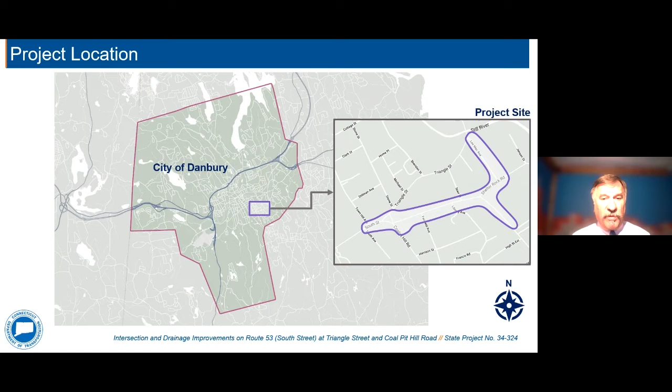The project starts on South Street, or Route 53, at the intersection of Town Hill Road. Moving east, it includes the intersection at Triangle Street and Coal Pit Hill Road. Then drainage work only continues down South Street to the intersection of Shelter Rock Road. There's additional drainage being done south of Shelter Rock Road. And then a major drainage outlet trunk line runs down Shelter Rock Road, down Lee Mac Avenue, and discharges at the Still River.

Originally, this project was initiated as a safety improvement project. The city of Danbury, working with the Housatonic Valley Council of Elected Officials, or HVCEO, now termed the Western Connecticut Council of Governments, submitted a proposal for the project to be developed. DOT, in coordination with the city, developed conceptual plans which received the endorsement of the city and HVCEO.

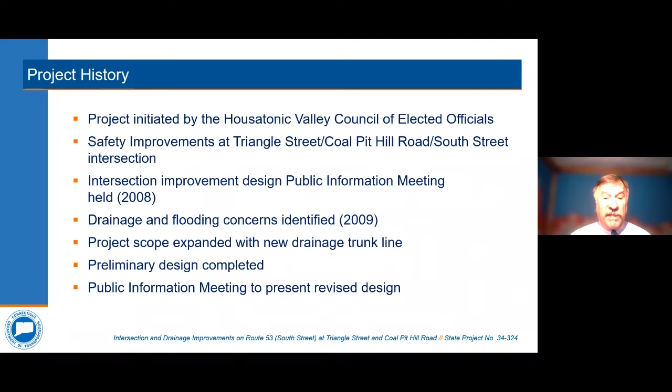In 2014, the scope for the project was expanded to include drainage along the entire route of the project, beginning at the intersection of Triangle Street and South Street, and a large diameter trunk line extending all the way to the Still River. In 2017, the preliminary design was updated to include that drainage work. At that time, the project was suspended for several years, and recently minor changes were made to the intersection lane arrangements at the Triangle Street Coal Pit Hill Road intersection. That brings us to today, where we're presenting the revised design in this public information meeting.

So there are several purpose and need statements that drive our goals for this project. The first revolves around traffic operations and pedestrian safety. There is congestion at the intersections and poor traffic flow, primarily because the lanes are offset and there's a lack of turning lanes, and the intersections are offset from each other.

There are inadequate sight lines at Triangle Street to South Street. There's a high rate of traffic accidents, many of which are rear-end collisions, and some of these accidents have resulted in personal injury. There are no crosswalks at South Street near Coal Pit Hill Road, and what crosswalks do exist within the project area are not ADA compliant.

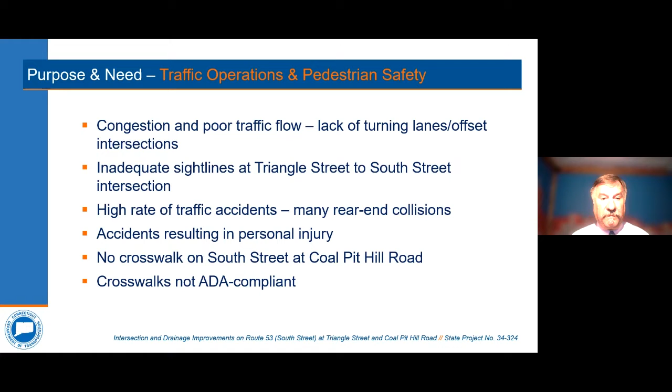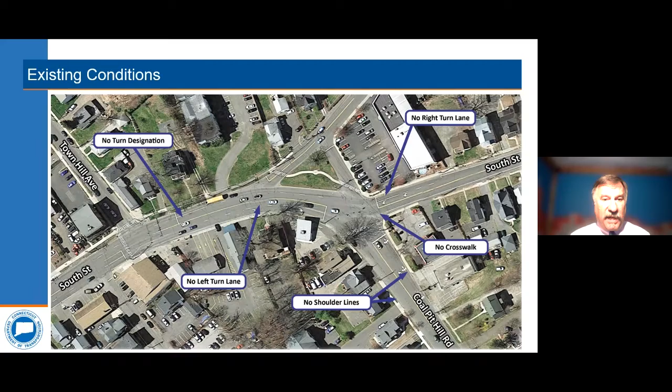So here's a map that shows what I just described. There's a lack of turning lanes at the intersections. The intersection of Coal Pit Hill Road, Coal Pit Hill Road Extension, and Triangle Street are offset from each other. There are no crosswalks across South Street, or Route 53, and the crosswalks that do exist are not ADA compliant.

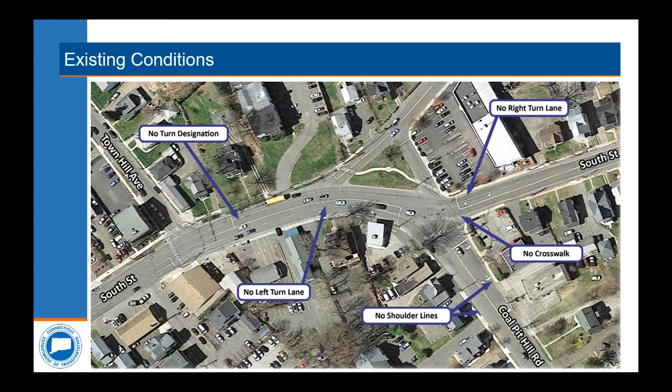This graphic shows vehicle crash information from the years 2019 to 2021. Overall, at the three intersections—Town Hill Road, Triangle Street, and Coal Pit Hill Road—there have been a total of 27 crashes in the last 3 years. 2 of these crashes have resulted in personal injuries. The types of crashes include rear-end collisions and sideswipe collisions, and the split between those two types is about 50-50.

Additionally, the distribution of where the crashes occur is about equal between the three intersections of Town Hill Road, Triangle Street, and Coal Pit Hill Road.

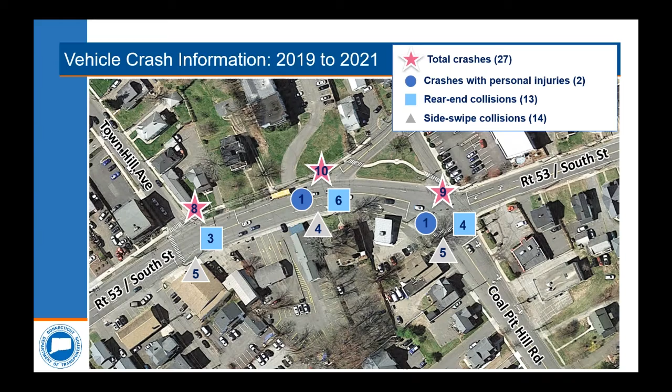The proposed intersection improvements include an upgraded traffic signal at Town Hill Road, an additional left lane approaching Coal Pit Hill Road so that traffic can turn safely onto Triangle Street, a replaced traffic signal at Coal Pit Hill Road, a realignment of Coal Pit Hill Road Extension with Route 53 to take advantage of the installation of the new traffic signal and improve safety, and upgrading pedestrian crossings and sidewalks throughout the project area in the vicinity of this intersection from Town Hill Road to Coal Pit Hill Road.

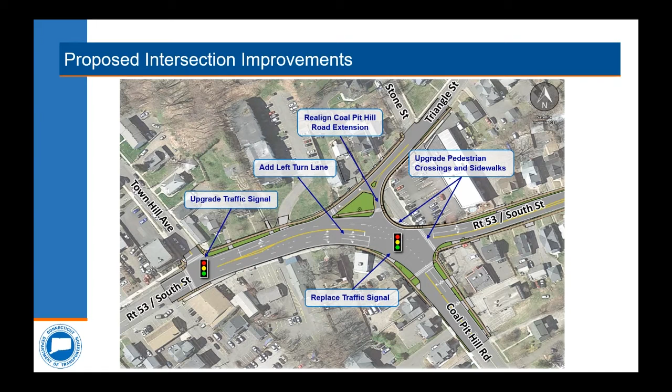With regard to the new traffic signals, the project goal is to make safety improvements without degrading or reducing what's called the level of service at the intersections. Very briefly, level of service is a measure of the delay experienced at an intersection, with A being good and F being poor.

By way of reference, level A is when the delay to start moving once the light turns green is less than 10 seconds. Level C is a delay of between 20 and 35 seconds. Level F is when there's over 80 seconds of delay after the light turns green.

So looking at the two traffic signals, when the project is complete, the level of service at Town Hill Road is expected to be level of service B. In the year 2040, that will reduce slightly to level of service C.

At the Coal Pit Hill Road intersection, when complete, level of service in the morning is expected to be C, and that remains level C in the year 2040.

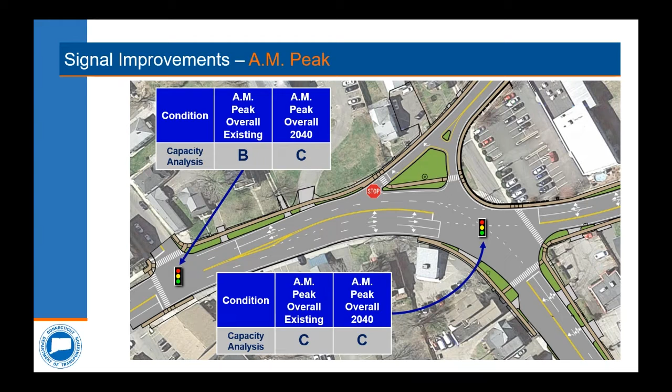I would like to say that without traffic signal installations and without these improvements being done, we would expect the level of service to degrade further than level C and D at the intersections in the year 2040. The goal of this project, after all, is to improve safety without significantly impacting traffic operations, and this design will meet that goal.

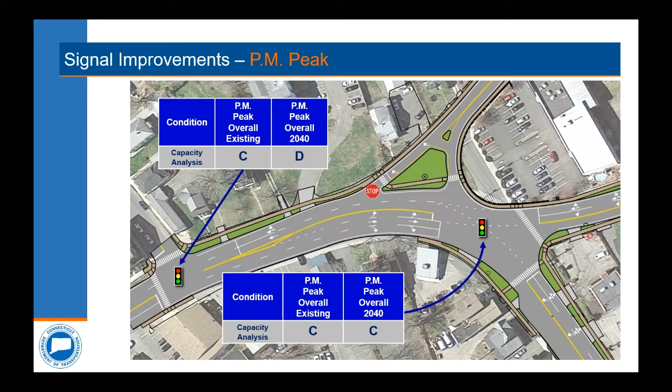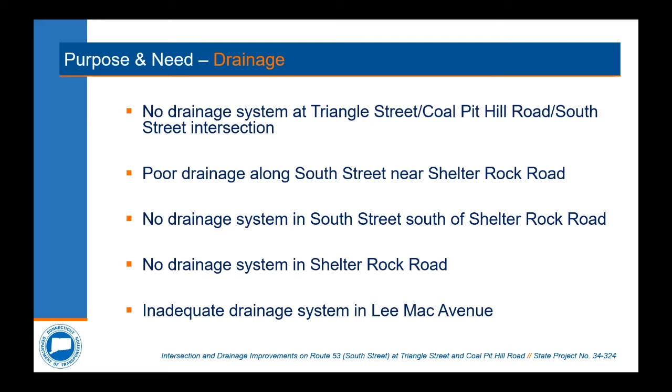The second purpose and need for the project, added on after the original public information meeting, is to improve drainage. There's no drainage system at all at the intersection of Triangle Street, Coal Pit Hill Road, and South Street. There's poor drainage along South Street near Shelter Rock Road. There's no drainage system in Shelter Rock Road, and there's no drainage system, or an inadequate one, in Lee Mac Avenue.

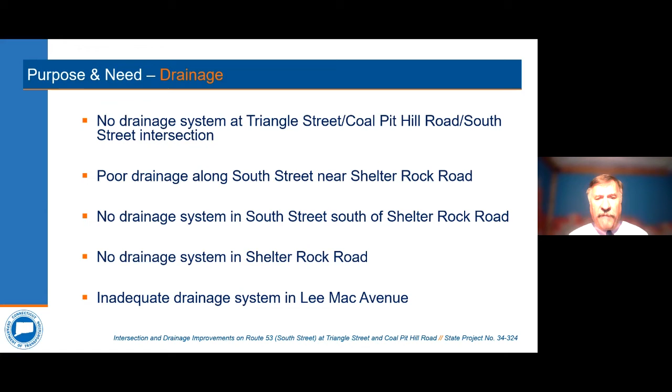And I've got some photos that were taken during one or more storm events, primarily in the area of Lee Mac Avenue. You can see 4 different locations with similar flooding. So the flooding in Lee Mac Avenue is widespread during large storm events.

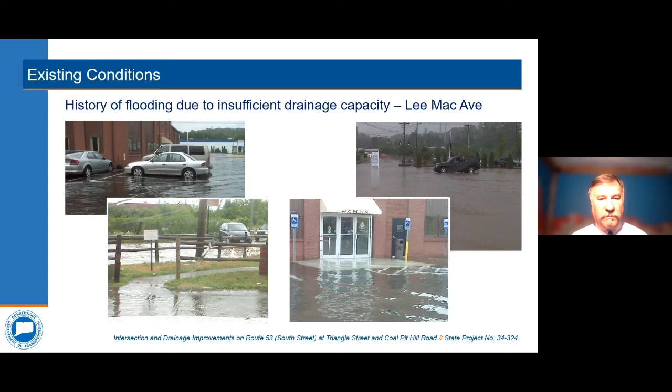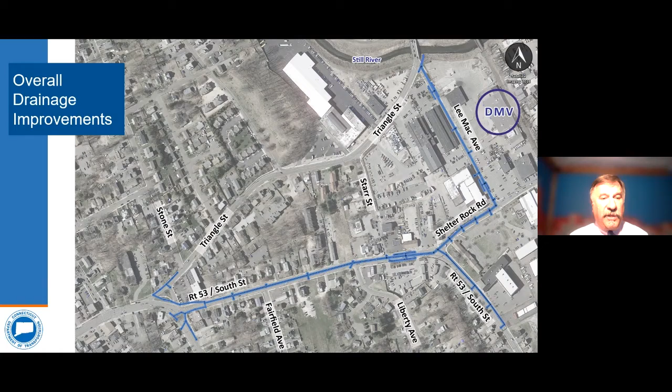This slide shows the overall drainage improvements throughout the entire project, with proposed drainage shown in the dark blue line. Beginning at Triangle Street, we are planning catch basins at the intersections, and I'll show that in more detail on the next slide.

A trunk line will run down South Street with catch basins on both sides of the road. At an existing cross culvert at a low point, there'll be additional catch basins. The trunk line will continue down Shelter Rock Road, then down Lee Mac Avenue, and will discharge at the Still River.

Additionally, south of Shelter Rock Road on South Street, we'll install catch basins as far as is practical to improve drainage along that road.

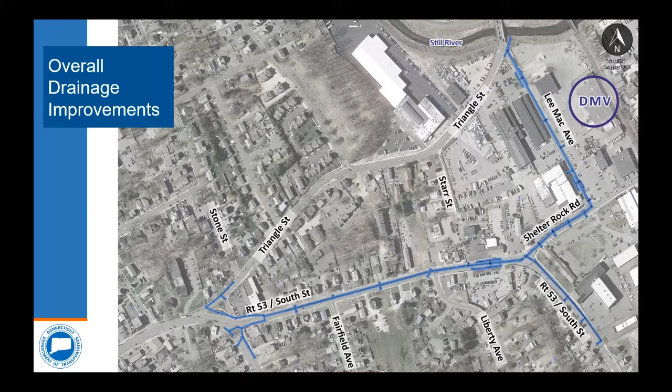At the Triangle Street, Coal Pit Hill Road intersection, there are a number of new catch basins, extending past the intersections down Coal Pit Hill Road as far as we could practically go, and up Triangle Street again as far as we could practically go. The purpose of these catch basins is to reduce flooding and to increase safety for vehicles and pedestrians alike.

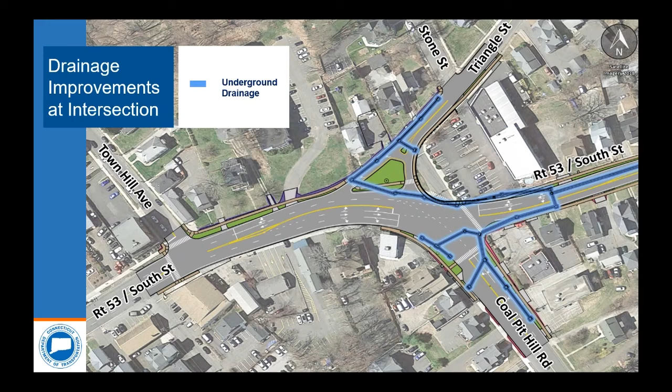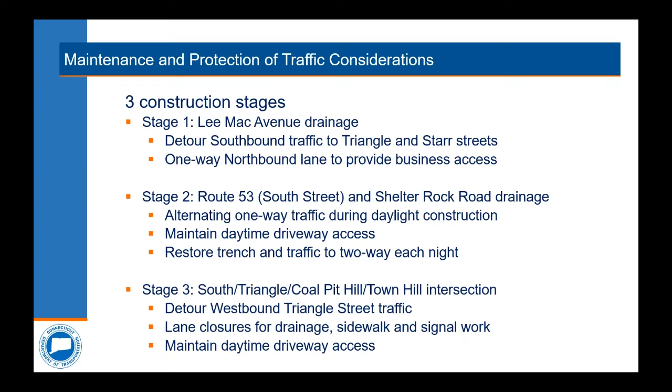Construction of all this work is expected to occur in 3 distinct stages. The first stage begins at the outlet of the Still River. The second stage continues along South Street, and the third stage is at the intersection of Coal Pit Hill Road and Triangle Street. I'll describe that in a little bit more detail for each of the stages.

Under the first stage, when the main trunk line is constructed from the Still River upstream in Lee Mac Avenue, because of the size of the pipe that needs to be installed and the amount of existing utilities in the roadway, we expect that we'll need one-way traffic on Lee Mac Avenue in the north direction, and traffic in the southerly direction will be detoured onto Triangle Street, then to Starr Street, then back onto Route 53.

We will provide access to all businesses and properties along Lee Mac Avenue and for all of the roads at the intersection at all times. Again, the reason for the restriction of one-way traffic on Lee Mac Avenue is because of the size of the pipe that's needed. We do recognize that the Department of Motor Vehicles is on Lee Mac Avenue, and access to the DMV will be maintained at all times.

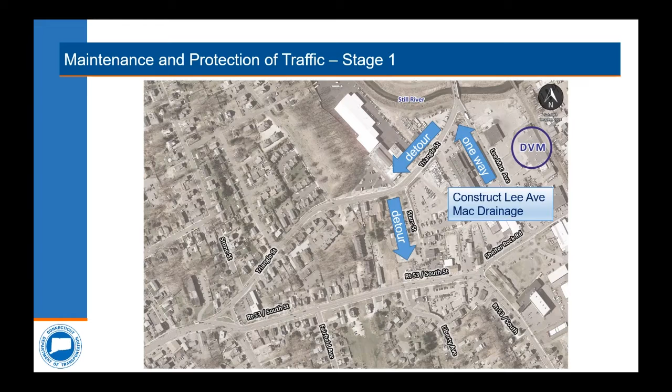In stage 2, that trunk line, which starts to get a little bit smaller as it moves upstream, will be installed along Route 53, or South Street. For this section of work, we expect alternating one-way traffic around the construction zone as it advances from east to west up Route 53. This one-way traffic flow will be maintained either by temporary traffic signals or traffic persons.

Once again, we will maintain driveway access to all properties at all times. In the evening, we expect that the trench will be restored, covered with trench plates, and two-way traffic will resume for the nighttime hours. So there will be alternating one-way traffic during work hours only.

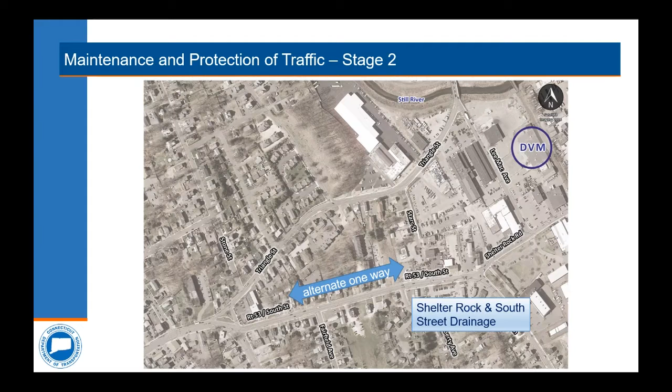In stage 3, the work will continue around the intersection of Triangle Street and Coal Pit Hill Road, then to Town Hill Avenue with the new traffic signal. We expect individual lane closures as the drainage is installed, as the signals are installed, and as the crosswalks are installed. Once again, we will maintain daytime access for all properties.

At this point, I'd like to turn it over to Matthew so he can discuss the right-of-way process.

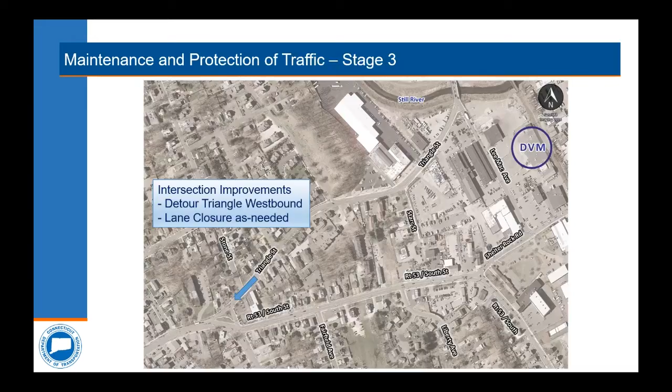Thanks, Al. I'm Matt Giannakopoulos, a project coordinator with the Department's Division of Rights-of-Way. It is our office's responsibility to acquire all the property rights needed for transportation projects. We anticipate that this project will require the acquisition of some property rights, so I'd like to give a brief overview of our right-of-way acquisition process.

We're still early on in the design process, so we don't have specific details on the property rights that will be required, but we anticipate the need for some strip or sliver acquisitions along the frontage of properties adjacent to the roadway, as well as some easements or drainage rights-of-way for the reconstructed drainage. But we do not anticipate impacting any homes or businesses, and no total takes of any properties are proposed.

Any property rights that end up being required will be acquired in accordance with the Connecticut General Statutes sections 13A-73 and 13A-98E. Whenever there is federal money used in any phase of a project, the department must adhere to what is known as the Uniform Act. You can go to the next slide.

Once the design is moved to the point where we're ready to begin the right-of-way acquisition process, each property owner will receive a letter of intent to acquire from our office along with a property map which depicts the exact rights to be acquired.

At that point, we determine the fair market value of those rights, and we use that value to establish an offer of just compensation. That offer is then sent out to the property owner in writing, and a right-of-way agent is available to meet with the property owner.

They can explain the project, the specific impacts to the owner's property, as well as explain how the state developed their offer. The property owner would have a reasonable time to consider the offer and enter into negotiations if they so choose. Once an agreement is reached, the DOT prepares all the necessary paperwork to transfer those property rights, and they file a deed and the property map on the town land records.

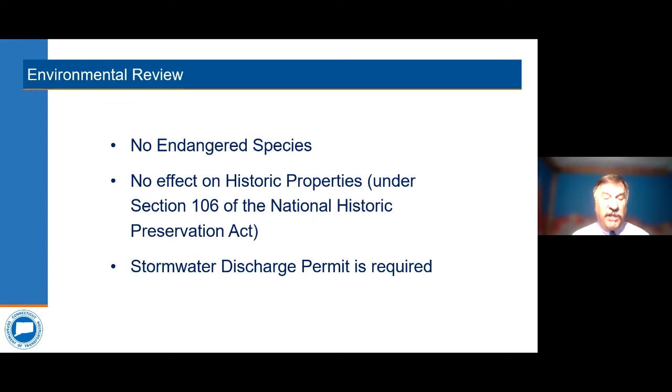Okay, thank you, Matthew. So the final couple of slides revolve around environmental review and then cost and schedule. The preliminary engineering work that we did included some work on permits to determine what the impacts of the project are and what the permit needs are. We have determined that there are no endangered species within the work areas and that there will be no effect on historic properties.

The primary permit that we do need is a stormwater discharge permit for construction of the outlet to the Still River.

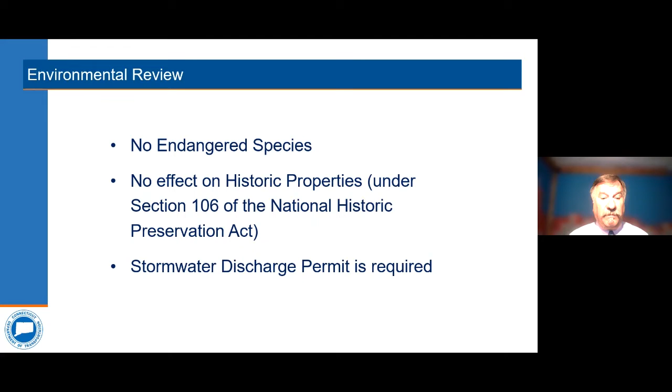So our current schedule is that design will continue beginning this summer at the conclusion of this public information meeting and the follow-up work that needs to be done after that. The work will continue through the fall and winter, and we expect it to be complete by June of the year 2023.

This will allow us to advertise for construction contractors in the summer of 2023. That will allow a construction start in the spring of 2024. We expect that the construction duration will be 1.5 to 2 years.

It is a very long project along a long route with large drainage pipe, and we want to maintain safe traffic during all of that construction period, and that does contribute somewhat to the long construction duration.

The estimated construction cost is $12 to $16 million. There's 80% federal funding for this project and 20% state funding. There is no city funding required for this project.

Now, Brett has got some slides to go through and an explanation of how you can ask questions.

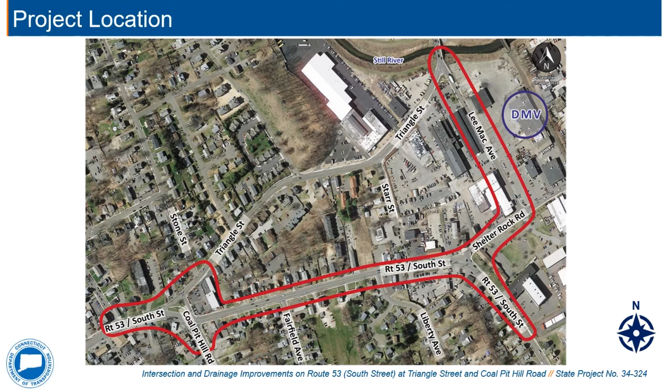Al: Yeah, thanks, that's a good question, and it's a tough one. The improvements are limited primarily to the intersection work necessary to improve the safety of the intersection at Coal Pit Hill Road and Triangle Street - traffic signals and new ADA compliant crosswalks and sidewalks in that area. There are not, however, planned dedicated bicycle paths. The primary reason for that is because of the width of South Street and the properties along South Street - there's not enough width currently to have a dedicated bicycle lane. The properties are very close to the street right-of-way line, so extending and expanding the roadway through that area would have a lot of impact to those properties potentially.

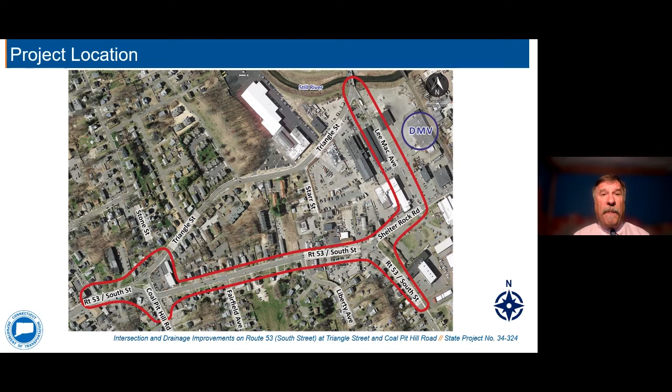I do want to point out that there have been some recent changes in state law regarding the room and respect that motor vehicles are required to give to bicycle riders. A minimum of 3 feet is required when passing bicycles, and bicycles can take up an entire vehicle travel lane when there is no dedicated bicycle lane. So while we are not able to increase the width of South Street to accommodate a dedicated bicycle lane, there are changes in state law that do make bicycle riding safer for bicyclists.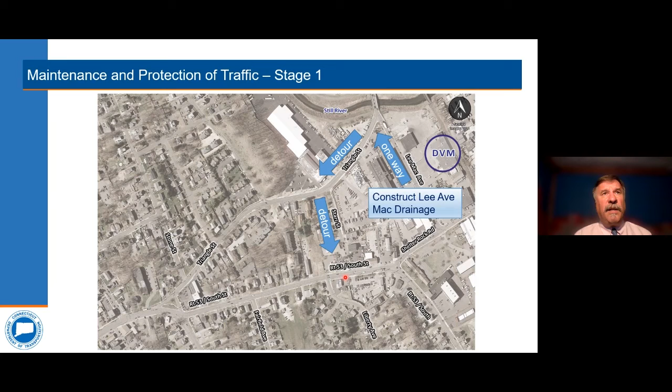So to recap, during construction of the large trunk line down Lee Mac Avenue, traffic will be restricted to one way in the northbound direction. Southbound traffic will be detoured onto Triangle Street, then onto Star Street.

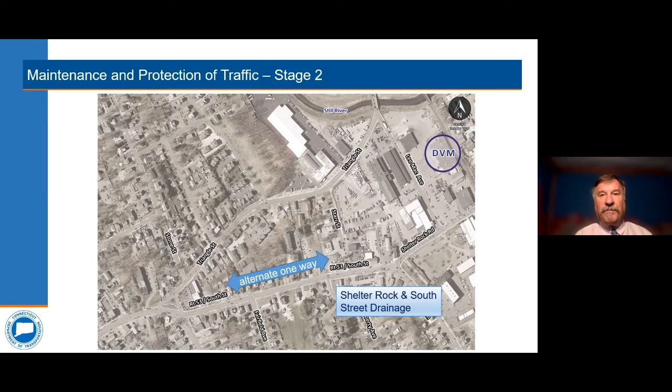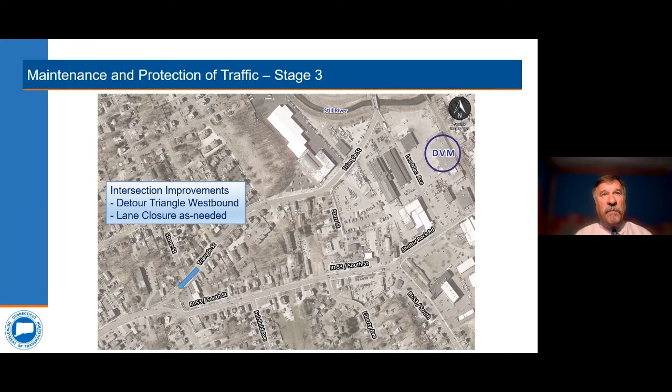So hopefully that's a thorough explanation of our expected maintenance protection of traffic schemes. Thank you for that, Al. Okay.